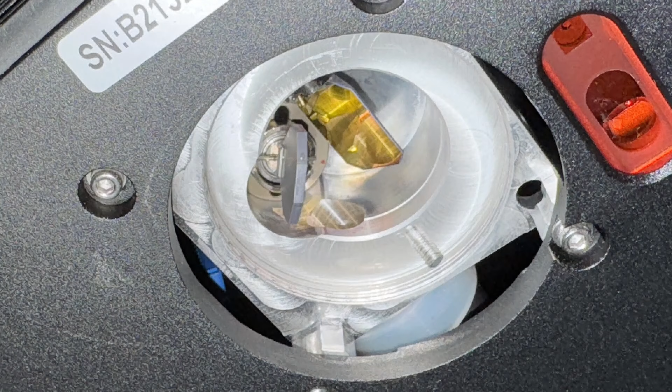This machine uses a galvanometer system. In simple terms, two mirrors that rapidly steer the laser beam instead of a gantry with wheels or rods moving the laser head. It can engrave at speeds up to 10,000 millimeters per second. By comparison, most diode or CO2 lasers max out at a few hundred millimeters per second.

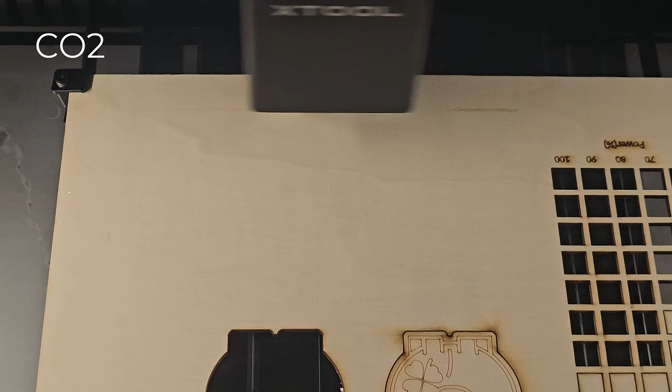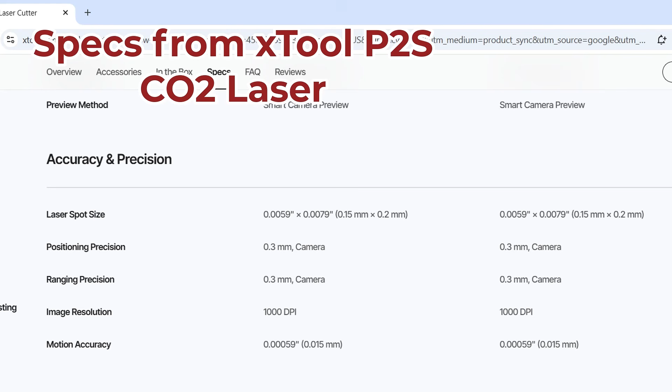The laser spot size is also extremely small. According to the manufacturer, the UV spot is over 500 times smaller than a 1 millimeter CO2 spot. In my experience, I've never seen a CO2 laser spot that large. They're usually in the 0.1 to 0.2 millimeter range. So in reality, the UV spot is about 50 to 100 times smaller, which is still an enormous advantage.

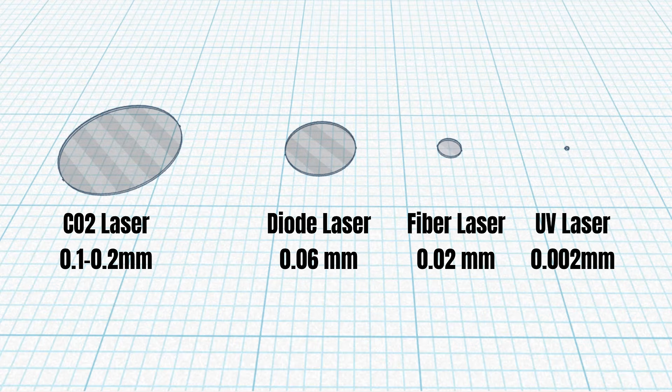Diode lasers are a bit tighter, around 0.06 to 0.1 millimeters, and fiber lasers can get down to about 0.02 millimeters, but the UV laser's 0.002 millimeter spot is by far the smallest, allowing for ultra-high resolution engraving.

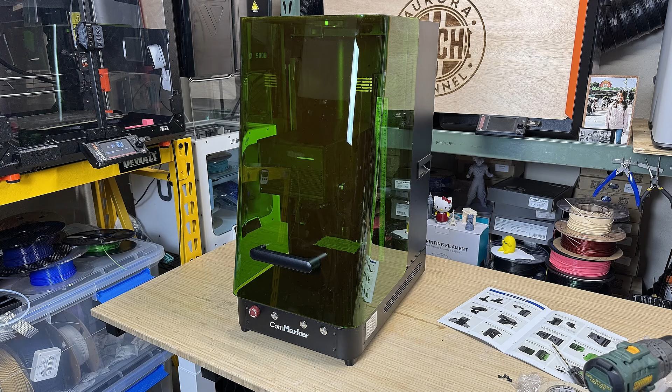The Omni X is fully enclosed and comes equipped with an LED light and circulation fans mounted at the top, along with a safety switch that detects whether the cover is open or closed. The footprint is approximately 14 by 26 inches.

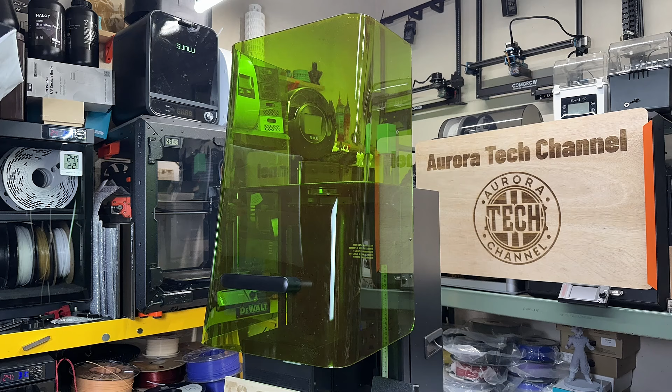That includes the space for the cables at the back. The height is about 27 inches when it's enclosed, but you need an additional 12 inches of clearance to allow it to be fully opened, bringing the required vertical space to about 39 inches.

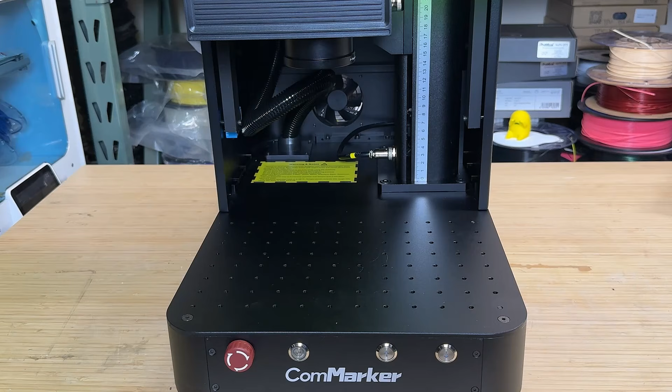With the stock 150 millimeter lens, the working area is 150 by 150 millimeters. An optional slide extension can expand this to 400 by 150 millimeters. The lenses, much like those on a professional camera, are interchangeable. For higher power density, the machine also includes a 70 millimeter lens, which is especially suitable for 3D engraving.

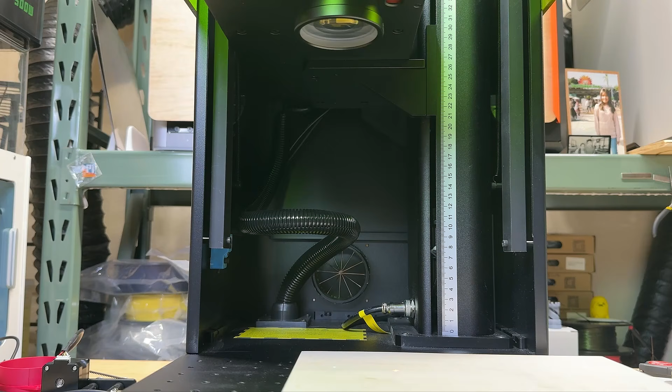Thanks to its tall design, the maximum workpiece height supported is up to 235 millimeters. The system supports autofocus using LiDAR. The manufacturer claims accuracy up to 0.001 millimeter. You can also manually focus using the buttons on the machine, the software, or by rotating the knob on top.

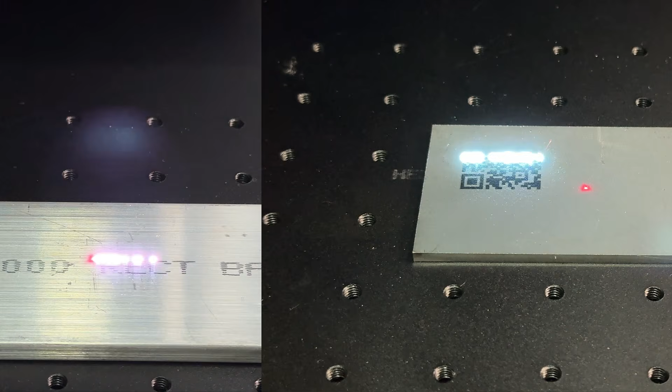In this video, I'll be testing various materials, including metals, wood, acrylic, plastics, and more. To demonstrate both 2D and 3D engraving, I'll also try out the rotary roller and the chuck.

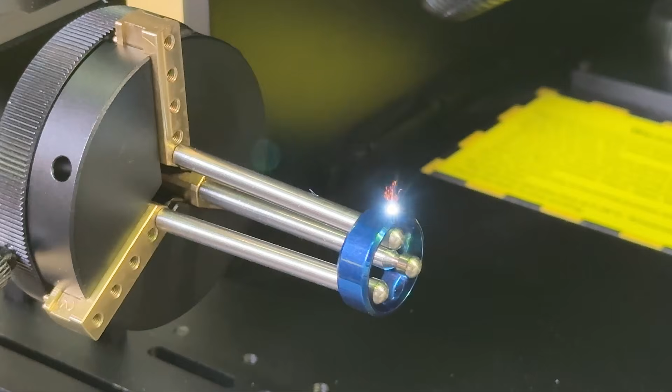The machine came in a thick outer box for extra protection, so the inner box was still in good shape after the long journey of shipping. The top layers include screws, cables, accessories, and a 70 millimeter lens that we'll use later. The laser head, base, and arm are packed separately, so we'll need to assemble them.

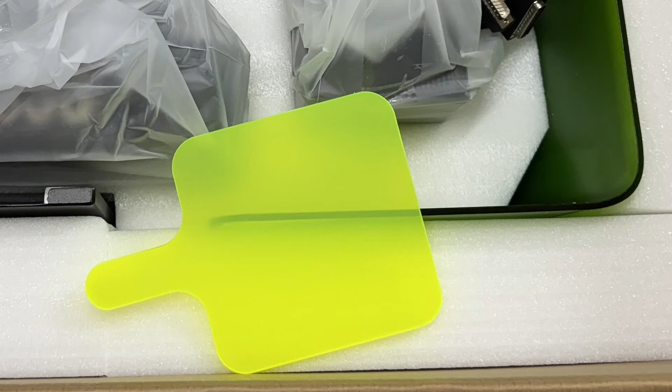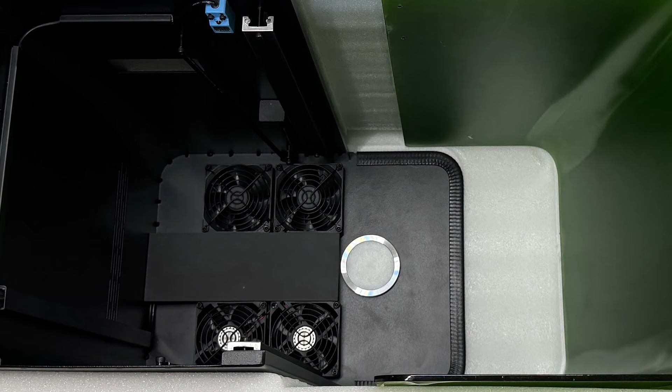There's also an interesting yellow ping-pong paddle-shaped thing that helps make the preview visible on certain surfaces. We will try that later. At the very bottom is the enclosure, which is equipped with an LED light and circulation fans. Since there are only a few large parts, assembly should be straightforward.

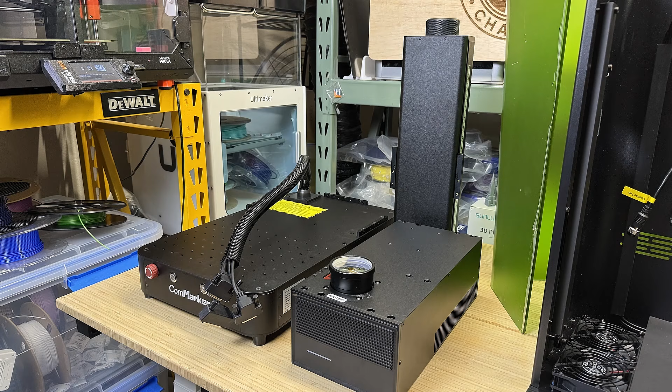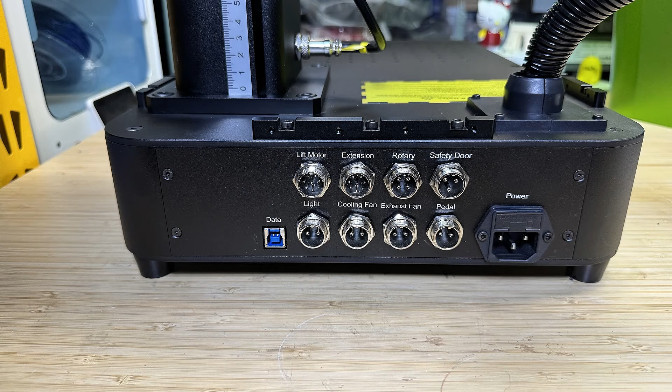I'll keep everything in the box and take out the parts as needed. First, let's put the arm on the base, attach the mount, and then secure the laser head onto the mount. Flip the unit around and connect the cables from the base to the laser head. There's also a cable that needs to be connected to the arm for the Z-axis motor.

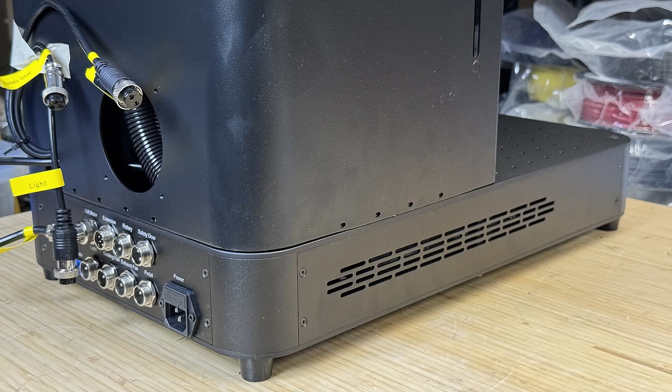Next, we'll set up the enclosure, snap the handles on both sides, then place it onto the base. I tape the cables to prevent the edges from rubbing against them. Tighten 4 screws on each side and the back. Then, connect all the cables from the enclosure to the back.

They are all clearly labeled. We also need to connect the USB cable to the computer and plug in the power cord. There's also a foot pedal, but I won't be using it right now.

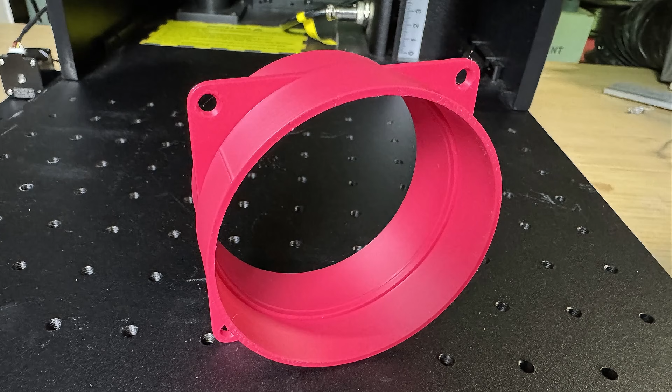Since this is a test unit, the exhaust duct wasn't included, so I 3D printed an adapter and hooked it up to my existing ducting setup. It's not pretty, but it works.

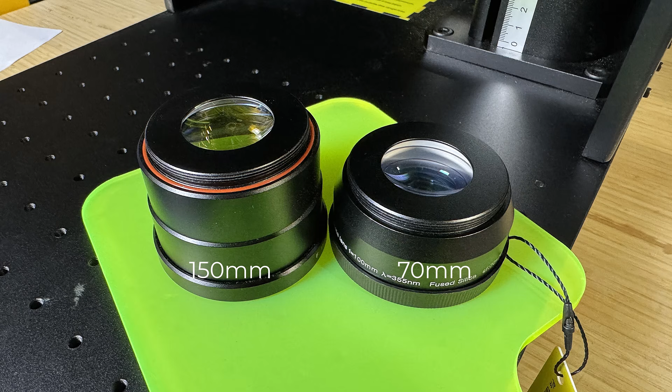Now let's look at the software and start our first job. ComMarker has finally moved away from the very old-school EZCAD software to something with a modern interface, similar to xTool software. By default, the machine comes with the 150 millimeter lens installed, so in device settings under Field, I'll make sure the parameters match.

If you want to switch to a different lens, like the 70 millimeter, you can load another profile. This beta software still has a few missing translations, but the parameters update correctly. Let's switch back to the 150mm profile for now.

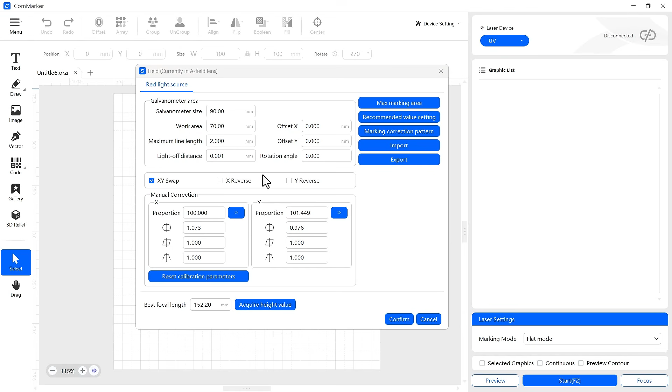For our first engraving, I'll import a photo. Unlike diode or CO2 lasers where you mostly adjust power and speed, UV lasers also let you control frequency and pulse width, similar to a MOPA fiber laser. Let's spend a few seconds going over how that works.

I made a simple scratch animation. It may not perfectly illustrate the physics, but it should give you a rough idea if you're new to fiber and UV lasers. For frequency, the higher it is, the lower the energy per pulse, but more pulses are delivered in the same amount of time.

This is generally better for light surface engraving and for producing fine details like small text or images. For pulse width, with a shorter pulse width, the energy is more concentrated, producing cleaner and crisper marks. When the pulse width is set higher, each pulse lasts longer, transferring more heat into the material. This can create deeper engravings, but the edges may burn or blur, and fine detail can be lost.

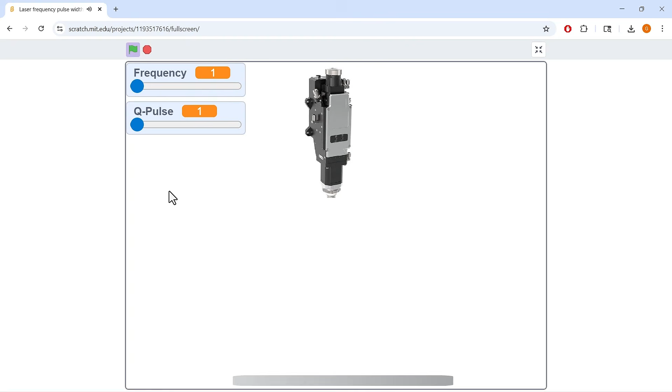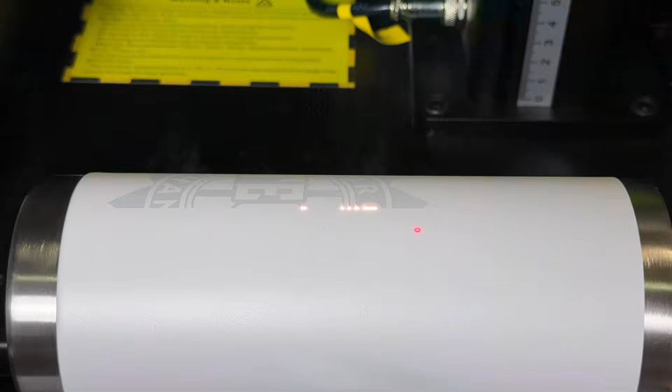Things work a little differently with UV lasers. Unlike MOPA fiber lasers, which offer a wide adjustable range, UV lasers usually have a fixed or very narrow range. That's because UV systems are optimized for cold marking, low thermal input processing on plastics and glass. With UV, fine control depends more on adjusting frequency, power, and scanning speed.

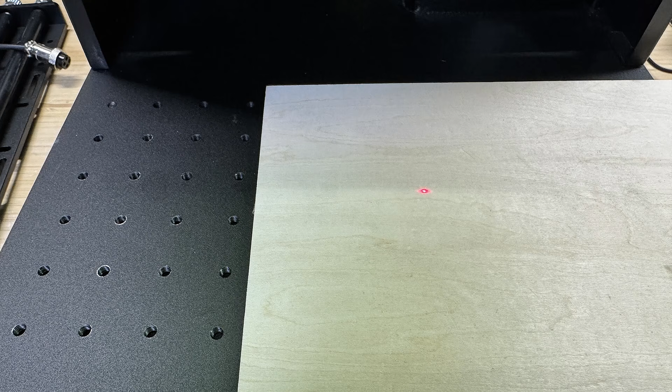Alright, lesson over. Let's go back to our first test. I'll scale the design to about 90mm and use the preset parameters for wood since I'll be starting with plywood. Let's let the machine run autofocus to set the focal length. Make sure the red dot is on the material.

The laser head will move up and down until it finds the optimal focus. Once it's in focus, the laser dot becomes sharp and as small as possible. If the dot looks large and blurry, that means it's out of focus. Autofocus is done, so let's draw a preview frame.

On plywood, the preview is visible, but on some materials you won't be able to see it clearly. We'll test that later. The preview looks good. We can now start the job.

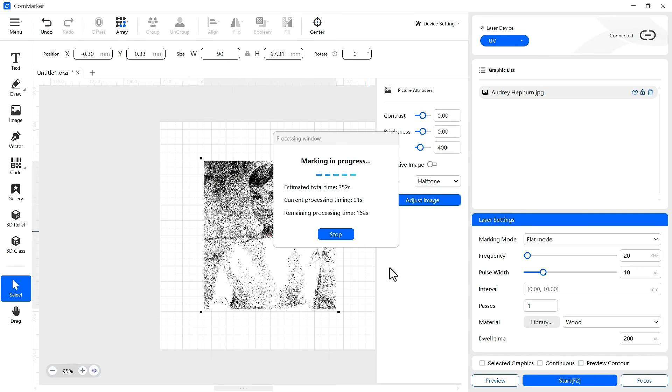The software shows the estimated time in seconds, which might test your math skills on longer jobs, but it is accurate. This run took exactly 252 seconds, or 4 minutes and 12 seconds. The result is stunning. This is my first UV laser test, and I didn't expect it to perform this well.

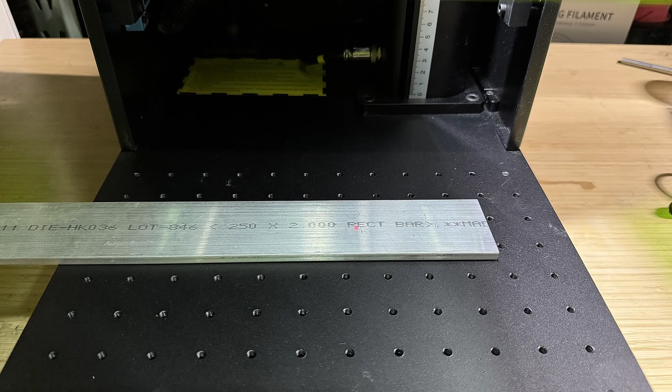Next, I'll try engraving on 6061 raw aluminum. I'll create a QR code using the software. You can choose barcode or QR code, then type whatever you want in the code. If you check display text, the text will show at the bottom of the code. By default, the software uses line mode, which just draws the outlines, but I'll also check fill mode to make it look more solid, similar to the example provided.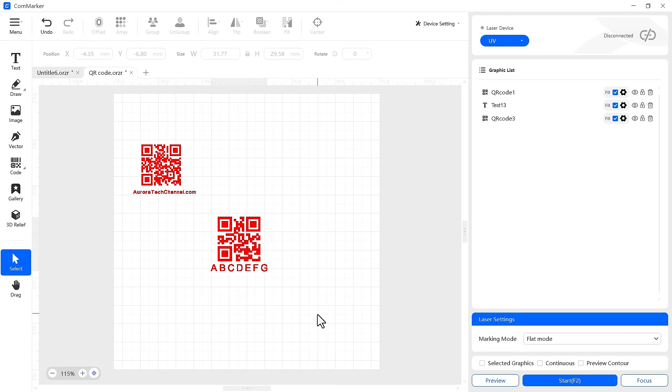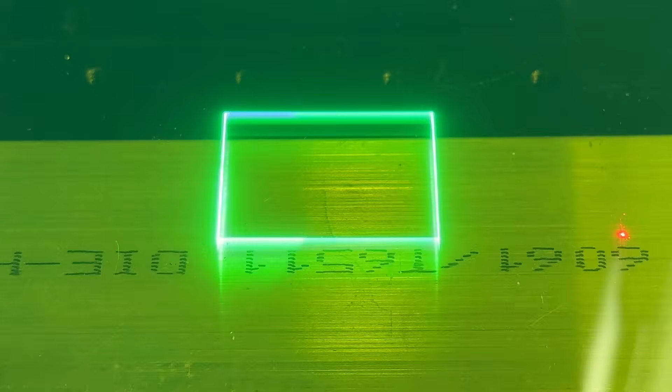There are settings for different metals, including aluminum, but I want to see what the general option is for, so I'll just try the general material setting.

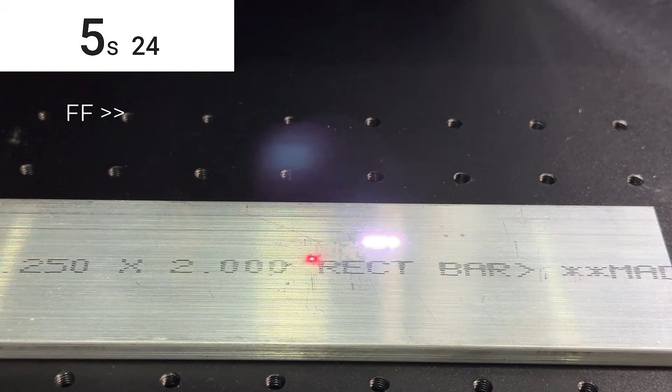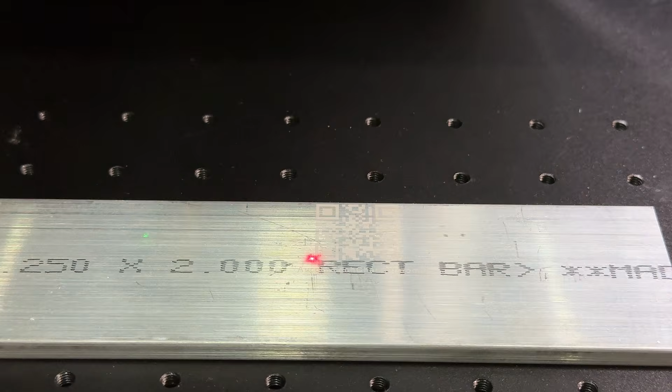That job took about 18 seconds. I'll make another one, this time choosing aluminum to see if there's any difference. It took the same amount of time, and the results look basically the same.

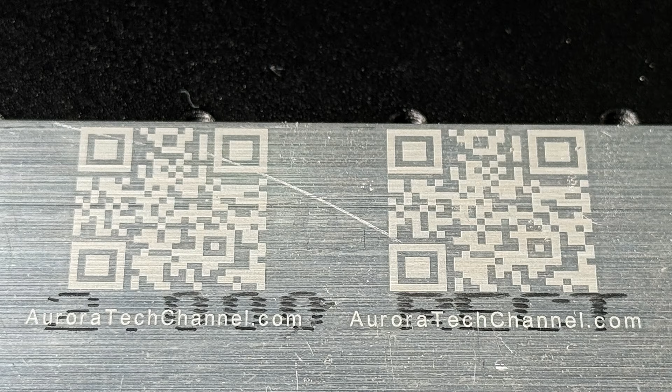Looking into the material library, I noticed that the general parameters are actually identical to those for all the different metals, including aluminum, stainless steel, mirrored stainless, copper, and even other metals and plastics. The only exception is transparent acrylic, which has slightly slower settings. Everything else is the same.

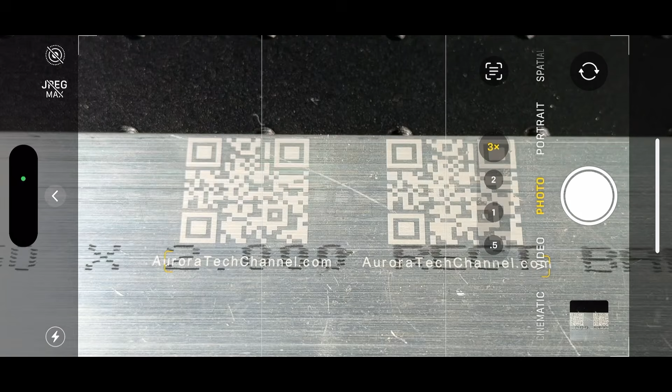Let's go back to the QR codes and check if they work.

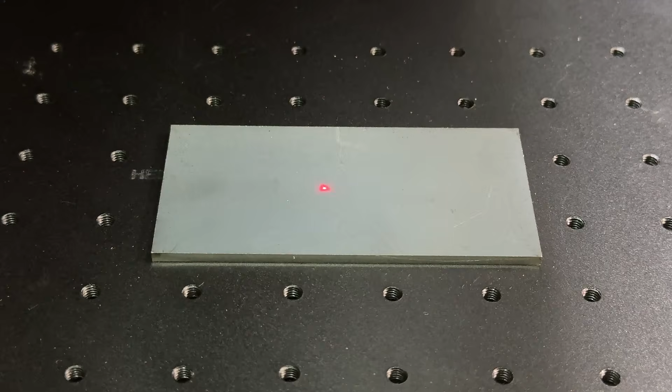Next, I'll engrave the same QR code on a piece of mild steel. Since all metals share the same parameters, I can simply start the job again. This took about 18.5 seconds.

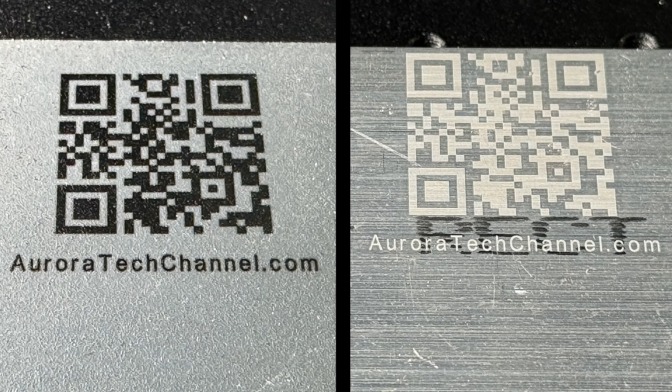The result looks very different compared to aluminum. The marking on mild steel is black, with a very sharp contrast. The text is also extremely clean, even though the letters are only about 1 millimeter wide.

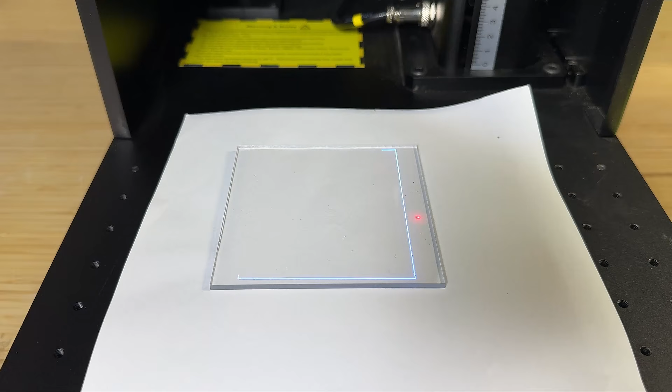Now I'll try some clear acrylic. While UV and CO2 lasers can mark clear acrylic directly, diode and fiber lasers can't without a surface coating. I put a piece of paper underneath for easier alignment, and I was also curious to see if the UV laser would leave a mark on the paper as well.

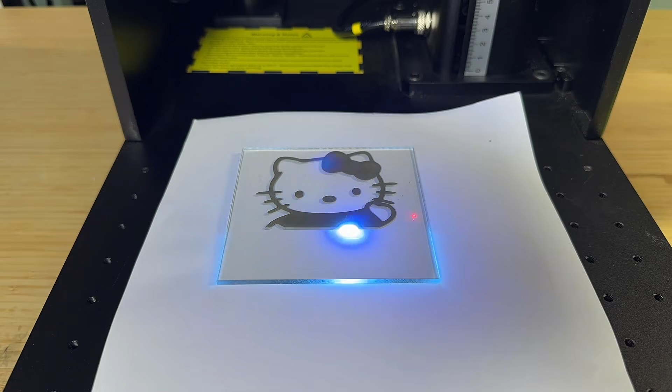This job took 314 seconds, or about 5 minutes and 14 seconds. The laser marked the acrylic cleanly, though there were some very light marks on the paper underneath. The engraving shows different shades of gray, and when you flip the acrylic, you can see the design clearly from the back as well. The result basically matches the image in the software.

Next, I'll test some 3D printed parts. I'll mark text onto this PLA box using the plastic or general material settings. It's pretty fast, and the cold marking process works really well on 3D printed parts. You can still see the surface texture from the PEI sheet. It doesn't heat up and melt the plastic like other lasers might.

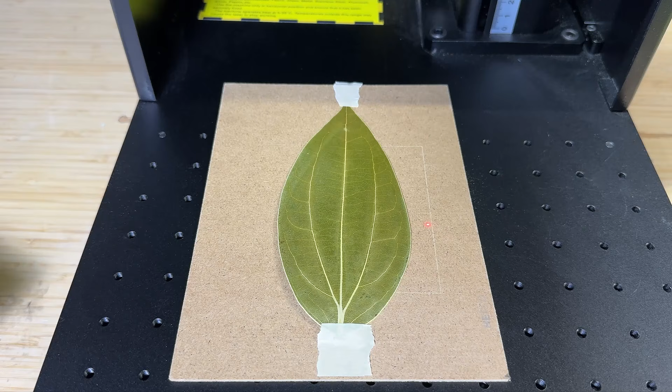The machine even came with some dried leaves, so I'll try engraving a photo on one of them. There's no leaf setting in the material library, so I'll select paper, which interestingly has the exact same settings as metal and general material.

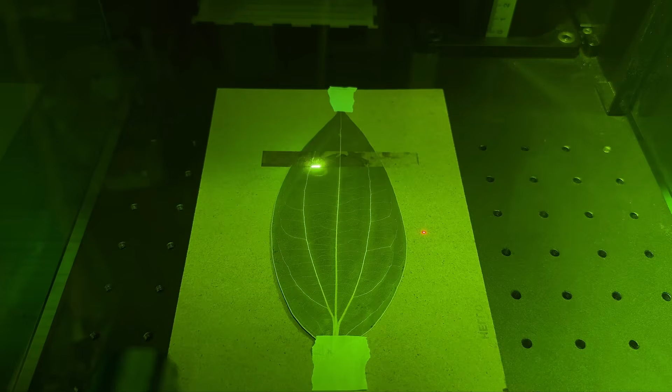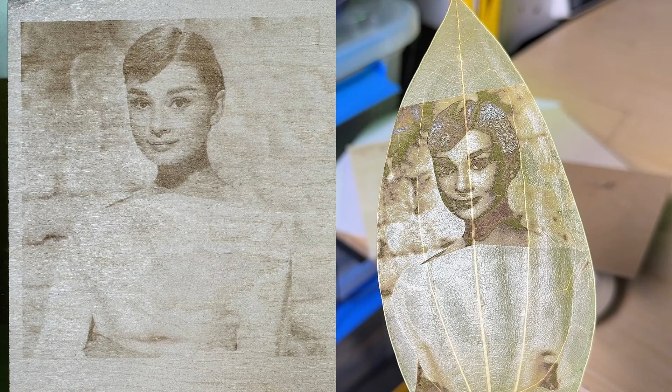The job finished in about 3 minutes, a little faster than engraving wood. The leaf shows a semi-transparent effect where it was engraved. It's pretty cool, though I personally prefer how it looks on wood.

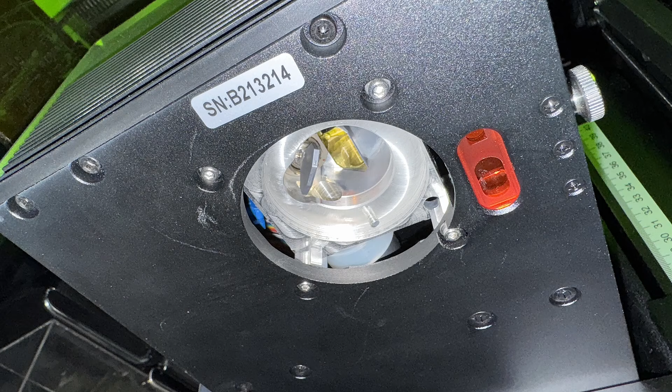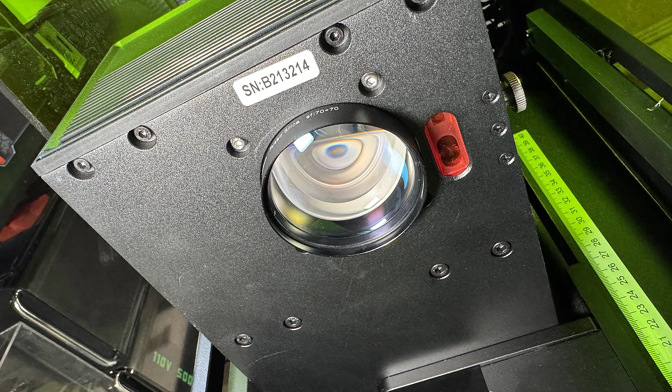So far, I've been using the 150mm lens. Let's remove it. You can see it uses a screw-mount lens system with a 2-mirror galvanometer inside. The screw mount is similar to what you'd see on vintage cameras. The machine also includes a 70mm lens, which provides a more concentrated beam, so I'll install that one and try some 3D engraving. I'll use the 3D glass mode and import an STL file.

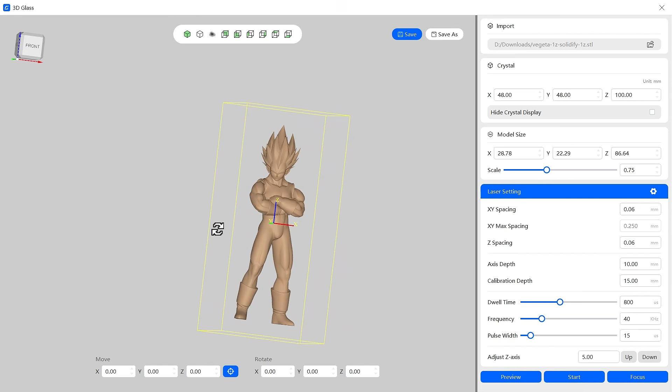This is just a regular STL file for 3D printing. You may recognize Vegeta, since he shows up a lot in my 3D printer review videos. The acrylic block I'm using measures 48 by 48 by 100mm, so I'll scale the model down to about 75%, which brings the total height to around 86mm. That seems to fit well, and there aren't many other settings to adjust.

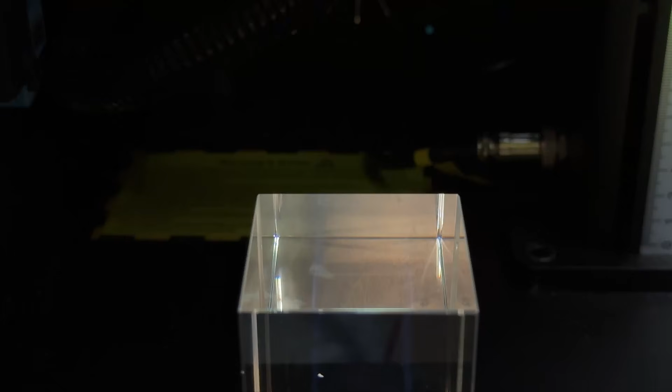For autofocus, you need to align the red dot to the base. In my case, I placed a piece of wood under the block and let it focus there, which matches the bottom surface of the acrylic. For the preview frame, it's hard to see on clear materials, so I'll use the yellow ping pong tool again and try to position the engraving as close to center as possible.

During the engraving, the laser penetrates all the way through, but by default it leaves an offset of a few millimeters from the bottom. At first I didn't realize this, but after confirming with ComMarker, that's how it's designed to work. To fix it, I'd need to either lower the laser head a few millimeters or raise the acrylic with a piece of wood underneath.

For now, I'll just let it run and see how it turns out. Here's a 20 times time lapse. Of course, in real time it doesn't engrave that fast. Here's the actual speed. A little faster than a 3D printer, but still much slower compared to 2D engraving. Just like a 3D printer, it engraves layer by layer and slowly works its way from the bottom to the top.

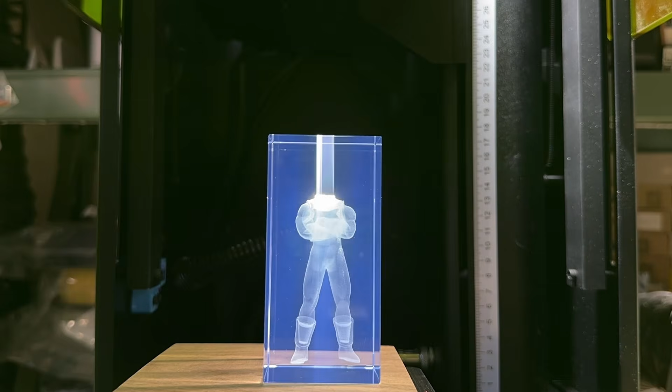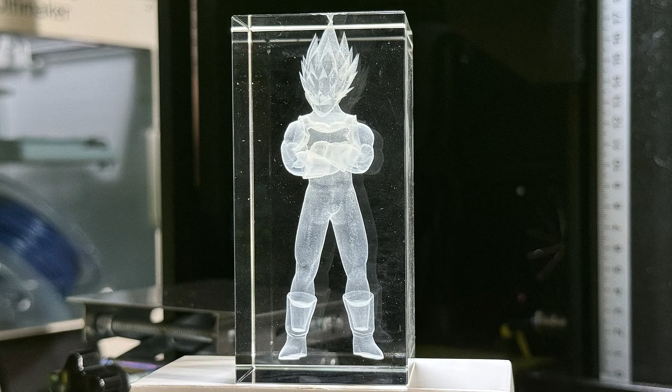There's no estimated time shown, but the software displayed a runtime of about 53 minutes, and that was almost exact. The final time was 53 minutes and 20 seconds. Because of the Z offset, the model's first layer was raised a few millimeters, which cut off the top of Vegeta's hair slightly. Besides that, the engraving came out beautifully, with crisp and detailed results.

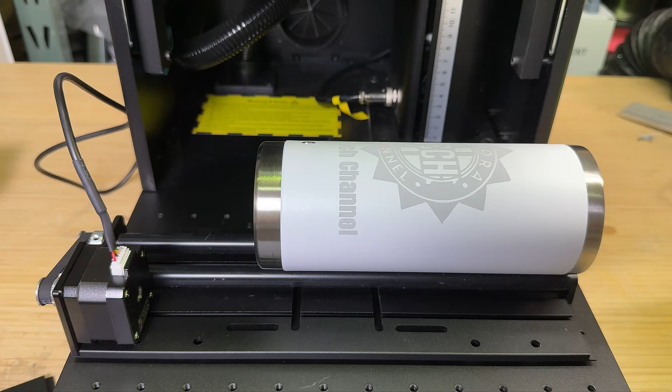Finally, I'll test the rotary rollers. The machine includes both a roller and a chuck, but I'll start with the roller. Since I don't have a stainless steel mug, I'll use one from the Eufy Make UV printer, which has a vinyl-coated surface. I experimented with different settings to dial in the best balance between speed and power.

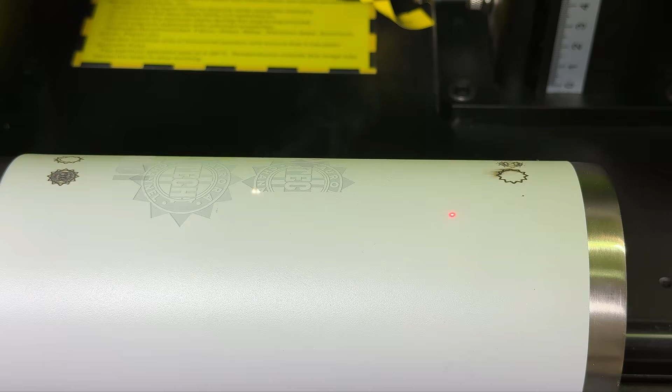Some trials had too much power, while others were too light. After some testing, I found the best results came with 5,000 millimeters per second speed, the maximum for the roller, 150 kilohertz frequency, and just 1 microsecond pulse width. Using those parameters, I engraved a logo on the opposite side of the mug.

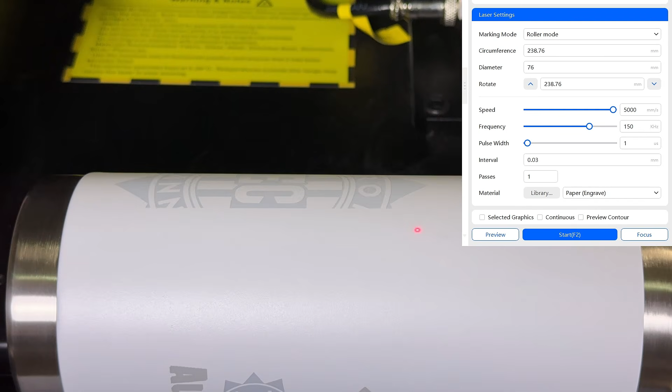The job only took 3 minutes, and the result looks great. Of course, I don't mind showing the behind-the-scenes process with all the trials and errors it took to get there.

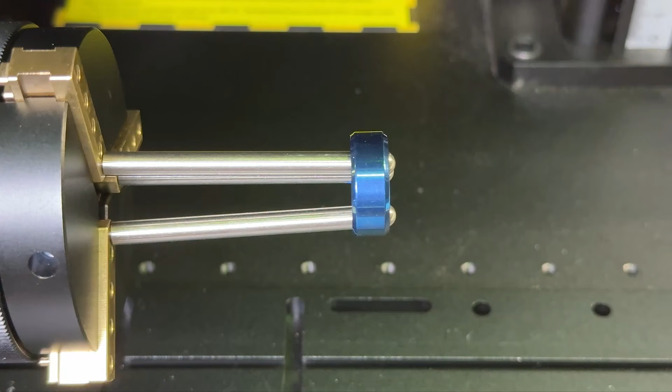I'll also try the chuck, which is meant for small objects like rings. As expected, the preview frame doesn't show up clearly on a ring, and even the yellow ping pong tool wasn't much help here. So the best I could do was keep the UV laser dot as close to center as possible and hope for the best.

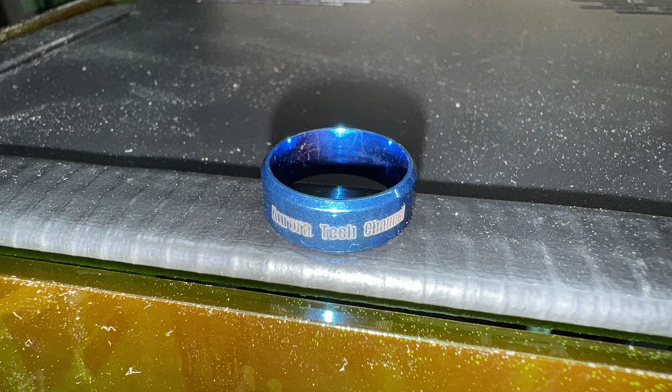The job finished in about 20 seconds, and surprisingly, the alignment wasn't bad at all. I'd say it's still acceptable.

Let's talk about the pros and cons of this machine, starting with the pros. First, the build is solid. The whole machine with the enclosure weighs over 120 pounds, which makes it really stable. Assembly is simple with just a few large parts to put together.

Second, the autofocus system is accurate. It uses LiDAR, which makes it extremely precise. The manufacturer claims accuracy down to 0.001 millimeter. I can't verify that exact number, but from all my tests, it's been spot on.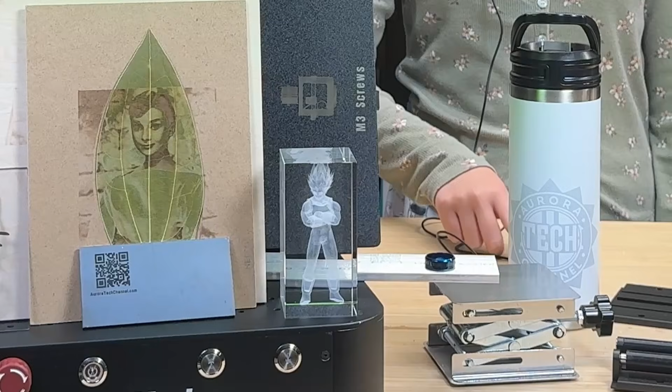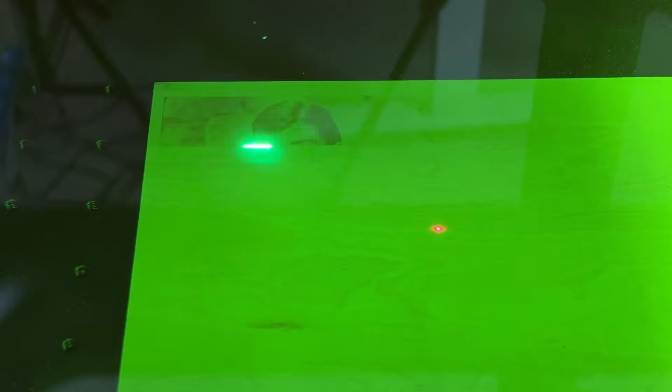Third, the speed is extremely fast. On a diode laser, engraving a photo of similar size usually takes around 40 minutes because the head has to move back and forth on rails. With the galvanometer system on this UV laser, it can reach speeds up to 10,000 millimeters per second. That same photo can be engraved in about 4 minutes.

Fourth, the engraving quality is stunning. The laser spot is only 0.0019 millimeters. That means photo engravings look sharp, clean, and highly detailed.

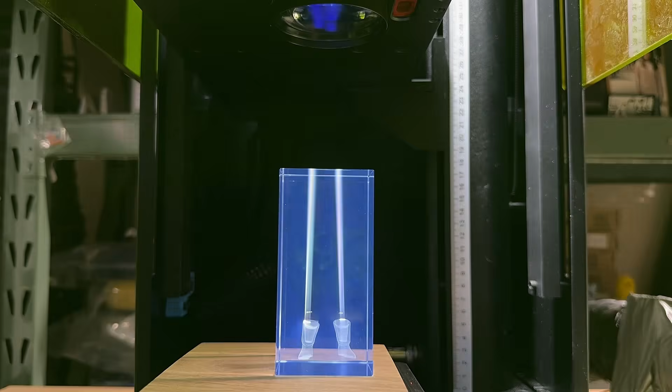Fifth, it works on almost anything. UV lasers are especially good for plastics and 3D printed parts, since the cold marking process doesn't melt or warp them like other lasers can. And it's not limited to flat surfaces. This machine can also engrave transparent objects and even create 3D engravings inside acrylic or crystal blocks.

Sixth, you also get flexibility with lenses. Swap to a larger lens for a bigger working area, or use a smaller, more focused lens for deeper or 3D engraving. It's like using a professional camera with interchangeable lenses, while lower-end lasers with a fixed lens are more like point-and-shoot cameras. Now for the cons.

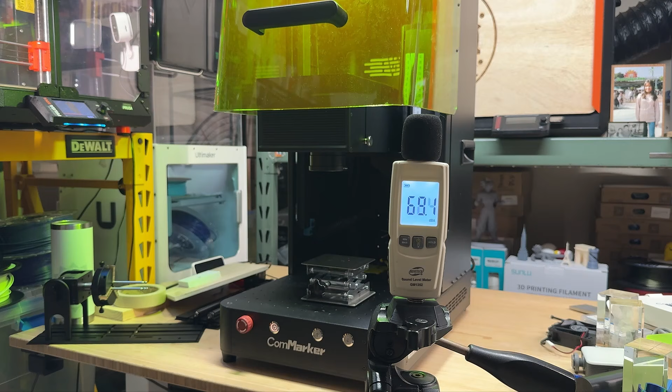First, the fans are loud. The enclosure fans run constantly, and the noise level can hit 70 decibels, a bit too loud for most offices, homes, or even workshops. ComMarker told me they will allow the firmware to control the fans, so they only turn on when the internal temperature is above 36 degrees Celsius. But in my opinion, that's not enough. A better solution would be to use PWM fans, so the speed ramps up only when temperatures are high, instead of blasting at full speed all the time.

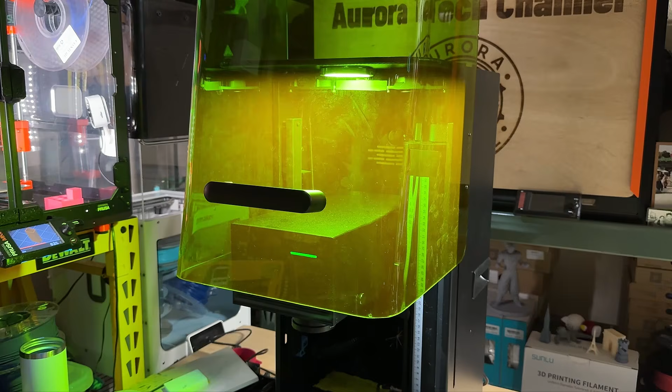Second, the LED lighting isn't effective. It's mounted at the top, but the large laser head blocks most of the illumination. The light really needs to be relocated to the side, or anywhere other than the top.

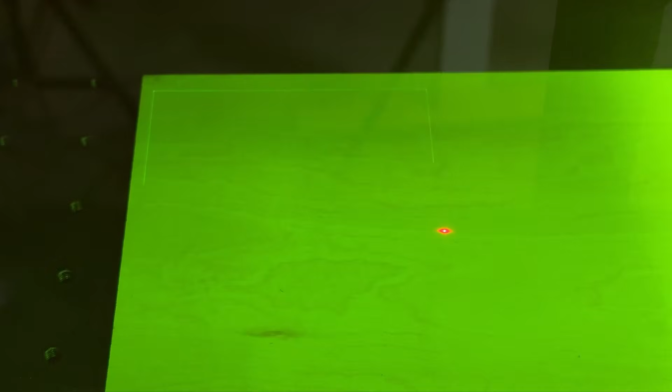Third, the preview can be tricky. The frame preview is accurate and great for alignment, but with UV lasers, you often can't see the dot at all on certain materials. That's where the yellow ping pong paddle tool helps. It works fine with flat and large objects, but when I tried the rotary attachment to engrave a ring, it became guesswork. Honestly, if that were a customer's diamond engagement ring instead of a cheap steel ring, I guess you would be nervous about hitting the start button.

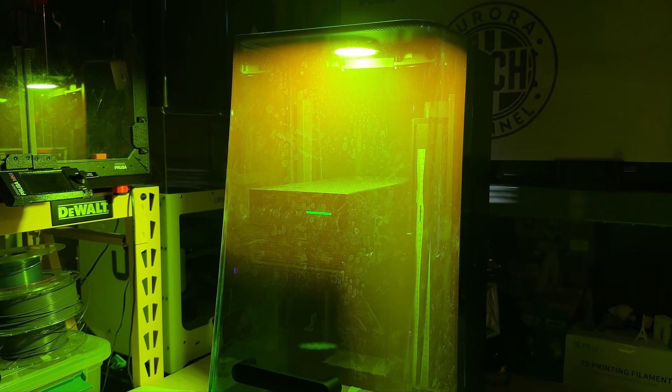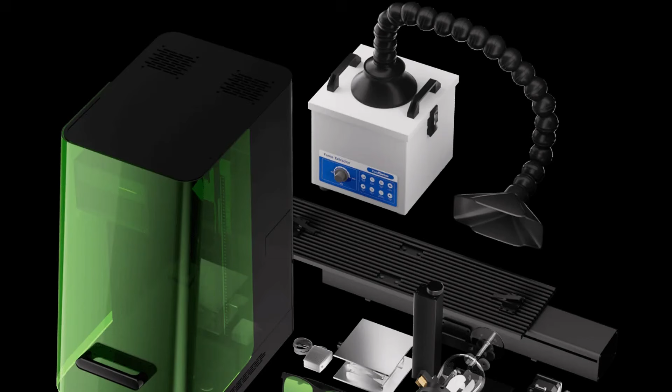Fourth, smoke management needs improvement. UV lasers don't make much smoke on metal or plastic, but wood still does. The circulation fans pull it upward, and with the exhaust port unfiltered, that smoke ends up in your room even with a duct fan. ComMarker says a new smoke purifier is coming that connects to the back of the machine and should handle smoke and fine particles much better. We'll see how it works in the final version.

In conclusion, the Omni X UV laser opens up many new possibilities for a laser engraving business. Since anyone can spend a few hundred dollars on a diode laser, basic engraving on wood or other common materials is already crowded with competition, which drives prices down. But being able to do 3D engraving inside a crystal really makes your product stand out, and more importantly, it gives you the chance for higher margins.

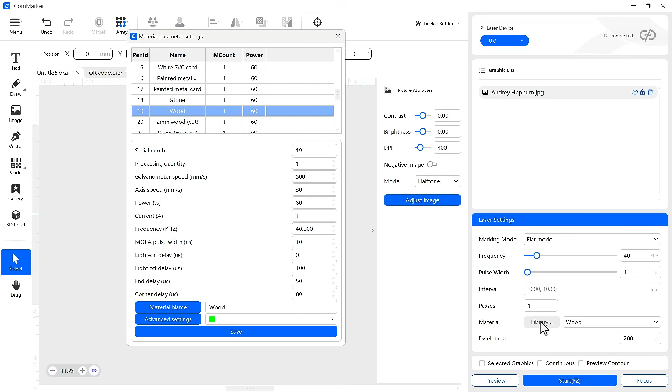Overall, this is a solidly built machine. The UV laser performs very well, with only a few minor issues in the enclosure design on this early test unit, but those issues are not hard to fix. The software is fully functional and a big step up from the old EzCad. It's not as polished as Xtool's software, though that extra polish is reflected in Xtool's premium price. Still, this new interface is a good start. I've already received 2 updates during my testing process, so I believe ComMarker will keep improving it.